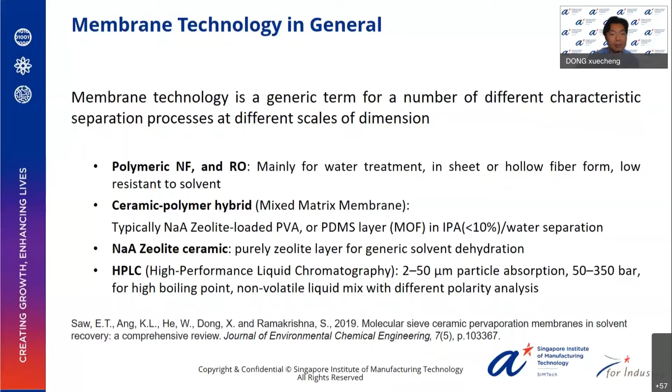So in SimTech, we developed a new series of ceramic membrane technologies, particularly for nano and sub-nano filtration. In this membrane, we incorporate crystal technology with angstrom-level filtration size. This is quite comparable to current reverse osmosis. And because it doesn't have any polymeric material, this pure ceramic membrane can be regenerated by thermal treatment. And this is considered a renewable membrane material.

And by nature it is also resistant to solvent media. So it has very strong stability in solvent filtration, and it can be applied to recover high-value solvents, let's say ethanol, IPA, and other organic material from water and solvent streams. So this would be a meaningful and very impactful technology for closed-loop sustainable manufacturing.

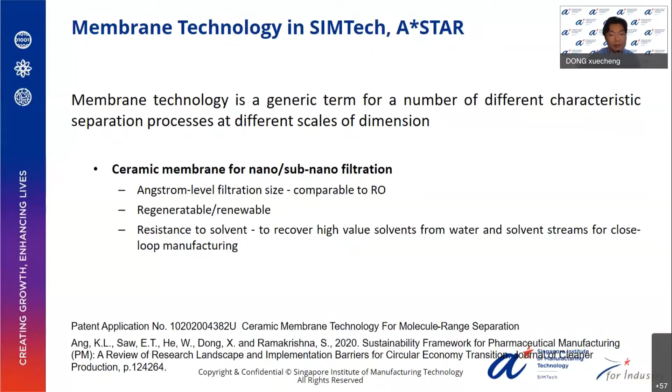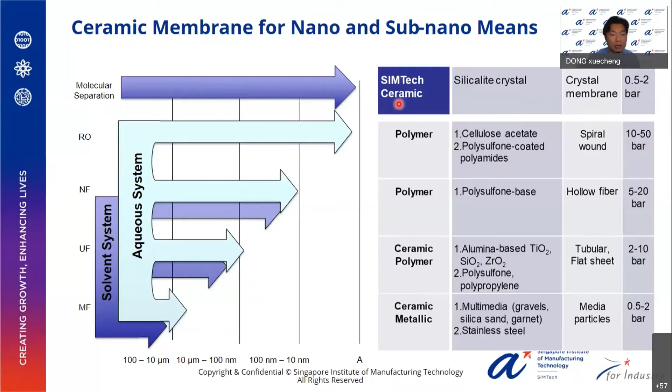The treatment is also a batch-by-batch process, and they are designed to be maintained as an offline kind of practice. Cost investment is also high, and the treatment involves temperature and other extreme conditions that may involve some chemical reactions if the waste stream contains sensitive ingredients and sensitive solutes that would cause health concerns and operation concerns.

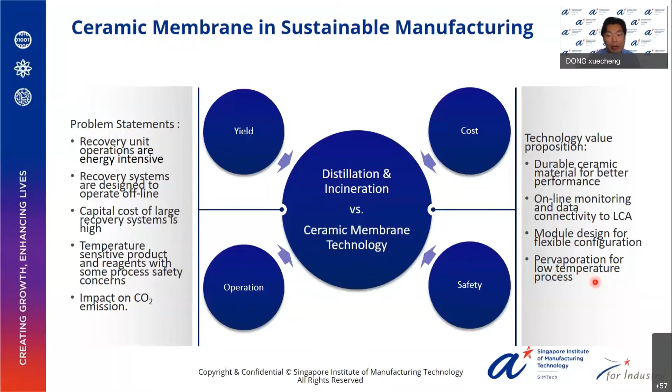And we also demonstrate our performance in a pervaporation setup. Pervaporation requires less temperature as compared to distillation. So later I will show some performance data using a pervaporation setup.

So let me go briefly through our membrane design. Our membrane is not a ceramic in a polymer matrix. It's a pure ceramic membrane. We use a commercial ceramic membrane support with or without surface modification. And we can also do our own surface modification to make sure our crystal material and the commercial ceramic are compatible. And eventually, we do a secondary growth to merge all the crystals together and form a continuous layer.

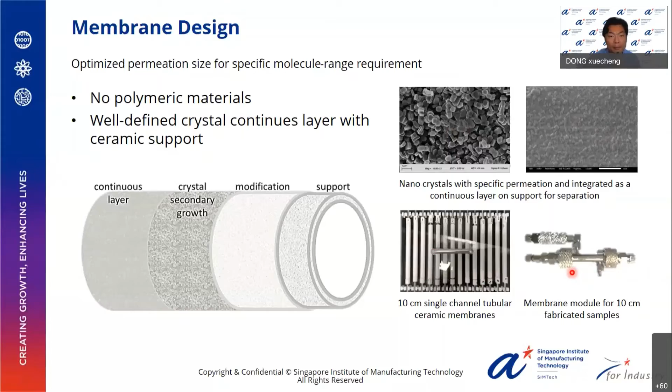And this is a picture of all the different variations of our ceramic membrane product. And eventually we designed this module to conduct a cross-flow filtration process. Let's talk about the performance. We have membranes for water. We have membranes for solvent. In general, we have two categories of our membrane technology. One is hydrophilic, one is hydrophobic.

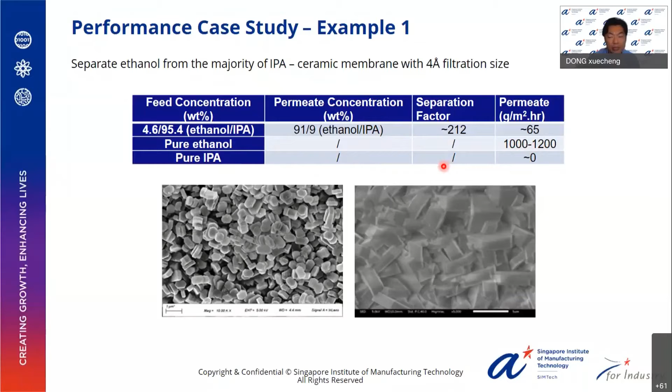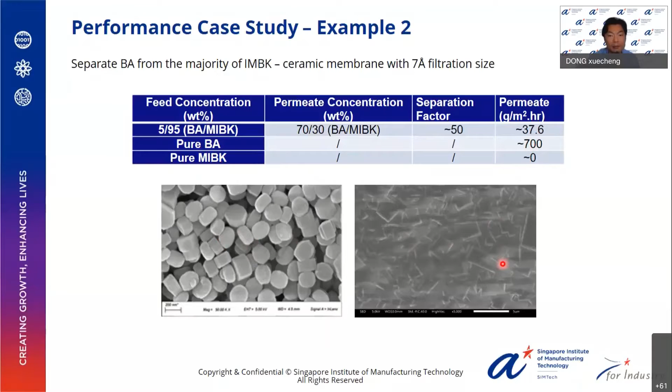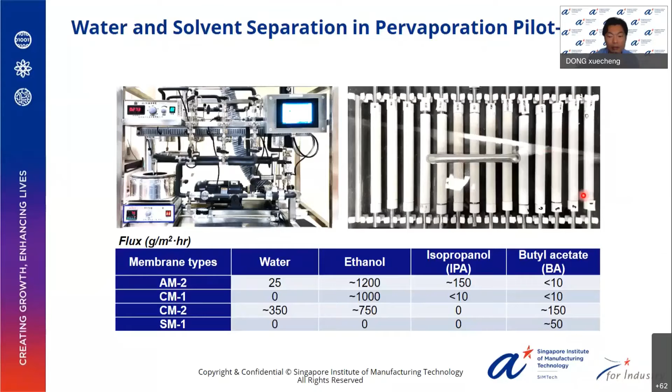And this is one of the summary slides of all the 4 typical membrane products we have. For water, these are the permeability, ethanol, IPA, butyl acetate. This is a class of hydrophobic membrane. So you can see all the water is almost rejected here. Although water has the smallest molecule, this membrane is still successful in terms of selecting or preferring the polymer or solvent media. And this is our pervaporation setup, and these are all the membrane products we have.

And the second portion, we calculate the energy comparison. Commercial distillation column absorption, we refer to the data from some available database. And we also tested and measured our energy consumption and converted them to the same unit. So in our process, our membrane separation has a significantly lower heat energy requirement and processing pressure.

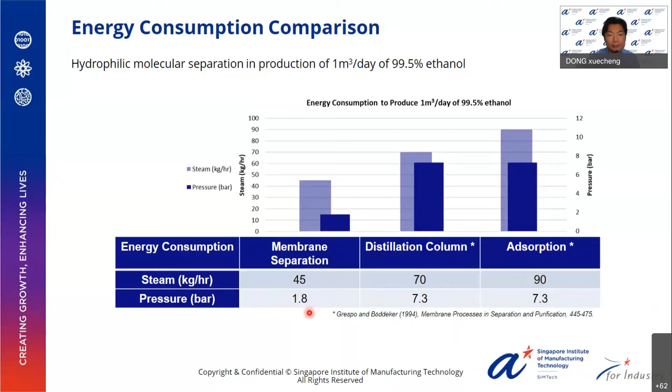Another example, we tested how to permeate or how to concentrate ethanol from a 50-50 ethanol water system. So this is the traditional distillation process, and this is the energy level of the distillation column. And this is our pervaporation setup. So the energy reduction is also very significant.

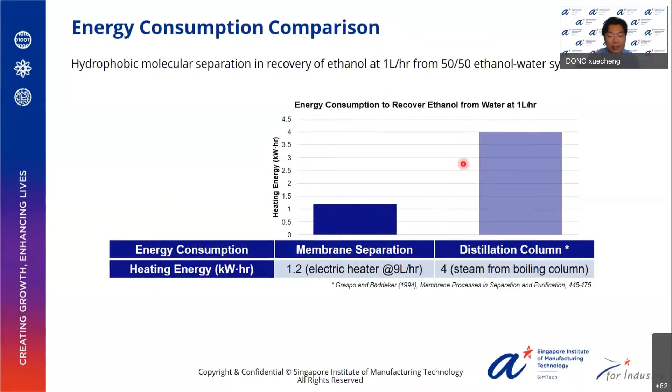So this would be a summary slide of our membrane technology. We consider all the commercial ceramic membranes, and we did further surface modification. And if we consider our unique crystal technology and we merge everything together, form a continuous layer, we can even provide a sub-nano, say, angstrom level ceramic membrane. These are a few pictures of the surface. And we further extend our technology to module design and preparation, system integration. And we can conduct a pilot test and pilot setup customization.

And these are the illustration of our approach. So we're talking about the size at nano and below nano. So this is the range. So this is the mechanism: smaller molecule or hydrophobic molecule. Let's say if the membrane is hydrophobic, it can permeate. If the membrane is hydrophilic, water can permeate. This is the product, this is the surface. So these are the modules we have, and this is the permeation setup.

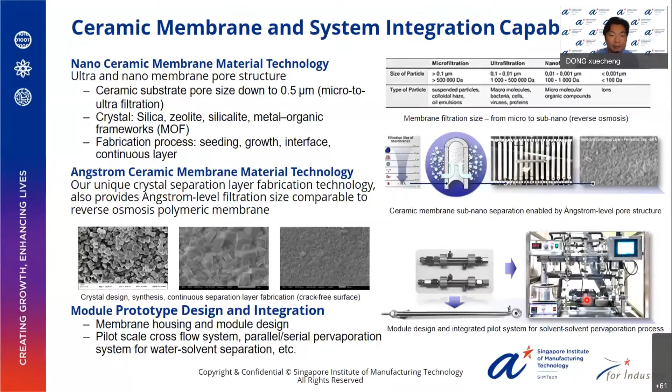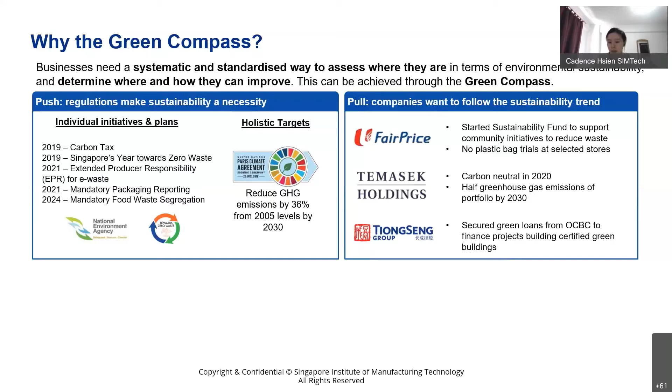Firstly, there are increasing regulations that make sustainability more necessary, whether on a government level or globally, with a goal to reduce carbon emissions. We also see that a lot of companies are going beyond what regulation requires and have the intention to follow a sustainability trend for their own companies as well as their own customers.

The Green Compass is a full framework that considers assessing the company at a basic level, how sustainable they are in different aspects. We recommend companies learn about sustainability so they can start their own sustainable journey. There could be some labeling and reporting useful along the way, and we are able to benchmark companies against some of the best in class to identify technologies they can adopt for improvement.

For the Green Compass, we take a value chain and life cycle perspective to look at sustainability. Through this perspective, companies can gradually transition towards becoming more environmentally friendly, more sustainable, and move in the direction of a circular economy.

We look at operations within the company, a product life cycle, and a supply network perspective, and the key areas we are interested in are carbon, energy, water, material, and waste.

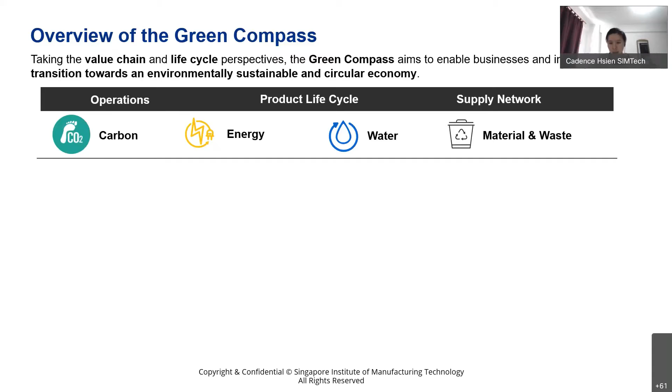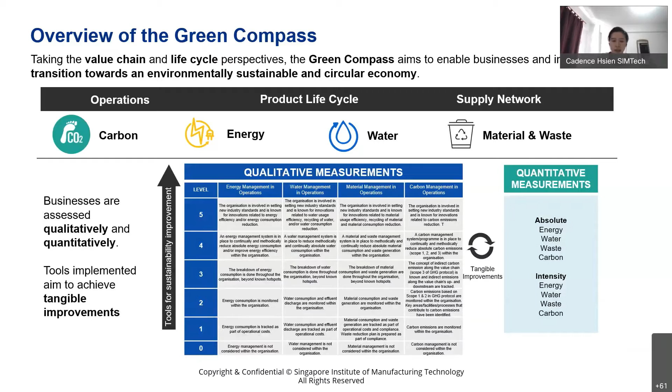The overview is to use qualitative means to assess companies so they can see qualitatively how they are performing, but also link this to quantitative measures so they can implement technologies, have tangible improvements, and come back to see how certain improvement activities have helped them.

The areas we look at within operations are energy, water, material, and carbon. But we also want to encourage companies to look along their whole supply chain and product life cycle to identify aspects of environmental impact that are crucial to their operations, as well as impacting

the country which is providing the raw material or even where the customers are using their product.

Today I will go more specifically into water management and operation. In this area, we consider all the water-related processes within a facility, as well as encouraging companies to look at improvements in water consumption efficiency that they can work on.

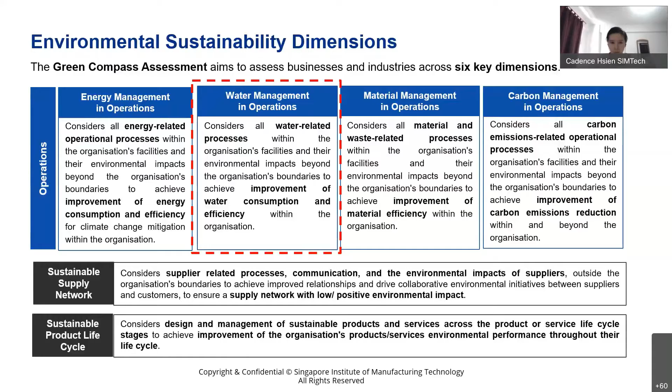Within water management and operations, we focus on areas key to driving water management improvement in the organization. This can be from a policy perspective — what policies around water management has the company adopted, what is the level of knowledge for water management within the organization, and what are some of the targets for improvement in terms of water efficiency.

We also encourage companies to look at the information system to know what type of water data is currently collected, to what level of detail or how frequently the water data is collected. This helps the company understand the water flow and water balance, and potentially identify some of the hotspots for improvement.

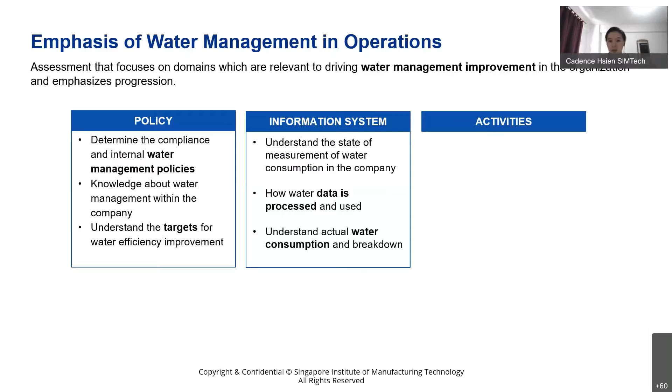We are concerned about how the collected water data is processed and what it is used for, and also understand the actual quantitative consumption and break down the different areas in the company.

Lastly, for activities, it's important that after the company identifies the total water consumption or hotspots in the area, we look at what technology or projects have been implemented before so we can improve water management and reduce water consumption.

In the self-assessment we have developed under the Green Compass, we look at these several aspects to determine the base state of water management in a company, and also try to collect some data about water consumption.

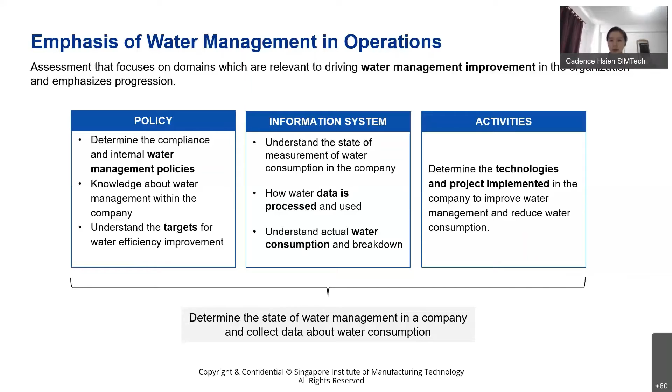This data would be useful in the future when technology has been implemented for improvement. We can come back to the past data to see what are the impacts due to the implemented technology, what are the improvements due to the technologies that have been implemented.

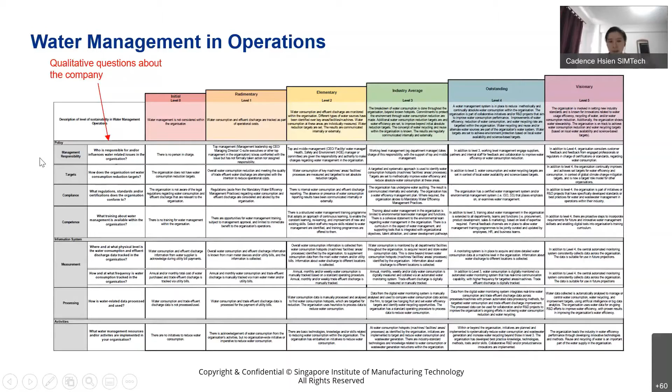So this is what the assessment looks like. It's in a maturity model form. Firstly, we have some basic qualitative questions about the company. The first row is about management responsibility: who is managing the water requirements for the company? The person answering this question can read across the different levels and identify what level of description is most suitable.

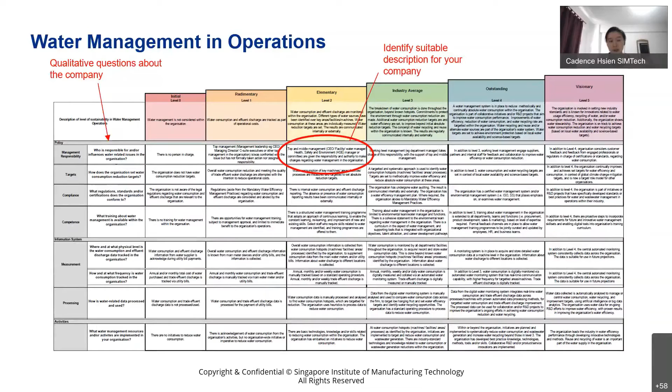This helps us have a basic understanding of what the company's level of maturity is in terms of water management. We have graded this in a maturity progression, so going up towards the right, you move from initial, which is level 0, towards visionary. The description for companies becomes more stringent the higher you go.

The benefit of this is that if a company sees they are at level 2 right now and want to achieve better water management, there's some idea on what some of the improvement steps could be as they gradually progress towards becoming more outstanding or visionary.

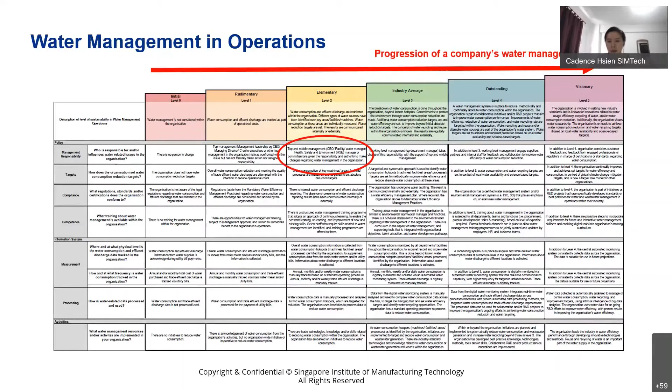The Green Compass is actually a full journey for companies, and what I've shared with you is the first step, which is to assess, having a basic understanding and assessment for the company. Within here, we recommend that companies learn about sustainability as well as water management practices, collect relevant data, and compute some key KPIs.

After learning and assessing, they can choose to verify with a third party to see whether some of the data that they have collected is valid and stands up to scrutiny.

After that, they can identify key areas and hotspots to prioritize for improvement, as well as plan their roadmap, whether it's a short-term, medium-term, or long-term sustainability plan for water management. This can be planned through our Green Compass journey.

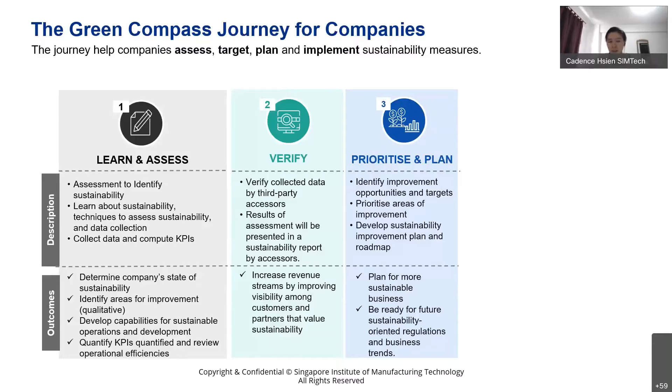Right after the whole plan has been developed, there can be a process to identify suitable technologies. For example, what Dr. Dong shared just now, potentially some specific technology that can provide tangible improvements should be implemented to improve the overall water management across the facility or even in terms of product management.

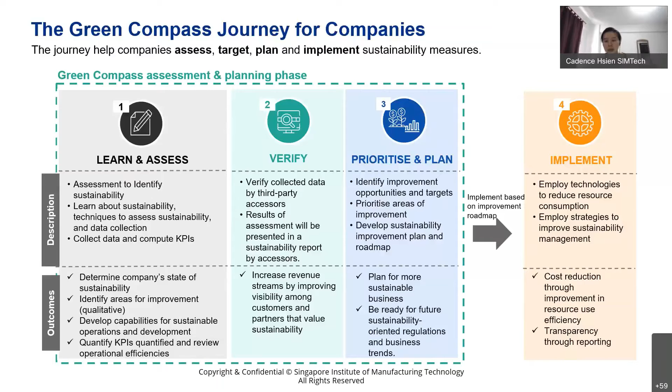So the Green Compass emphasizes the first three phases, and we can link companies towards potential technologies for implementation as well. Within the first step, where we learn and assess, we are in the midst of developing an online version of a self-assessment where companies can quite easily and for free assess their state of sustainability.

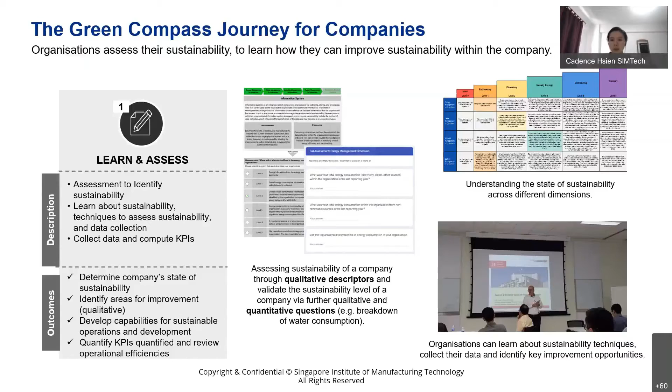We will also provide some basic results similar to the top right-hand corner, where you can briefly see a summarized version of the results of the assessment. We do recommend that you couple this with some learnings about sustainability or water management so that you can identify the most suitable area for improvement.

Next, there can be a step for verification if it's necessary for third-party assessors to verify the data that has been collected. Then the third step would be to prioritize based on whether it's the policy, information system, or activities that are not doing so well. Perhaps you want to prioritize that for improvement and plan for a longer-term sustainability journey for the company.

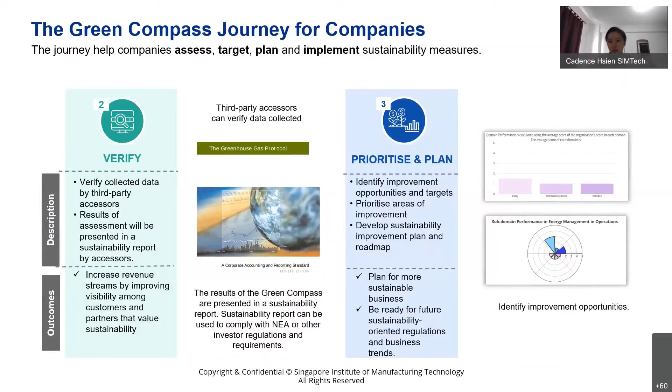So this is the end of my presentation. I'm very happy to have shared about the Green Compass in the area of water management.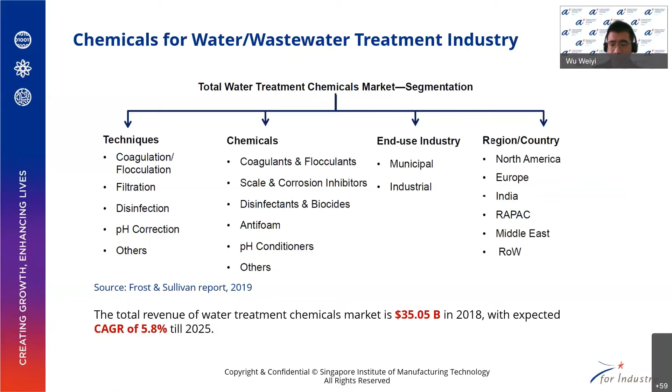As we are pursuing a circular economy and sustainability, there's a demand to reduce the chemical consumption associated with the wastewater treatment industry.

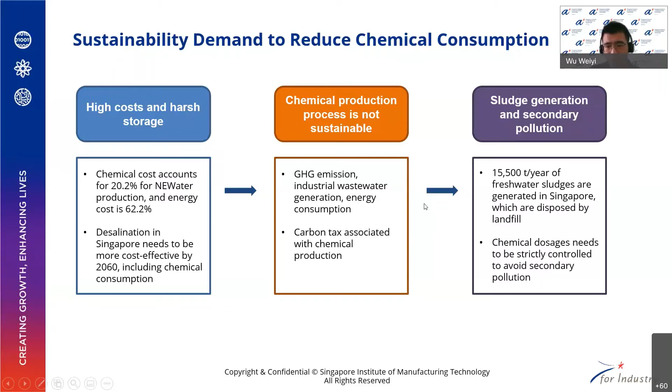At SimTech, we focus on several technologies. One is the electrochemical advanced oxidation process, or in short, EAOP.

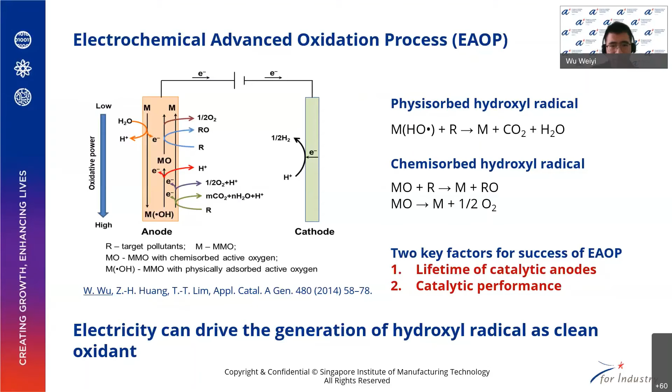After anode materials, let's look at the hydroxyl radicals. As we know, hydroxyl radicals have many desirable properties compared with other oxidants. However, the main bottleneck for hydroxyl radicals is their short lifetime in water.

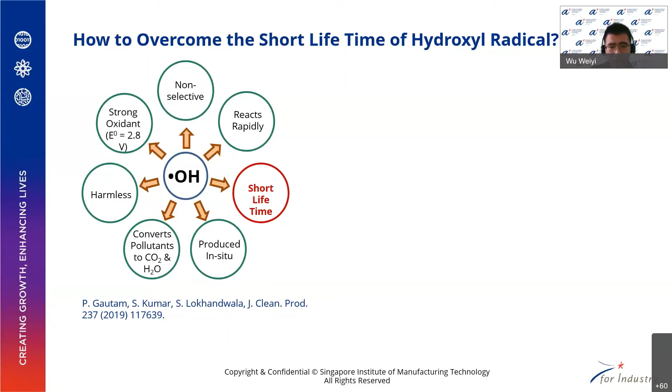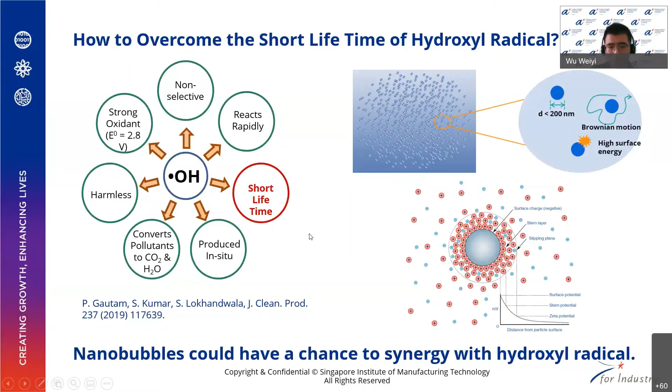There's a report that nanobubbles could even facilitate the generation of hydroxyl radicals. Because of this, there's great potential to hybridize EAOP and nanobubbles for a long lifetime of hydroxyl radicals.

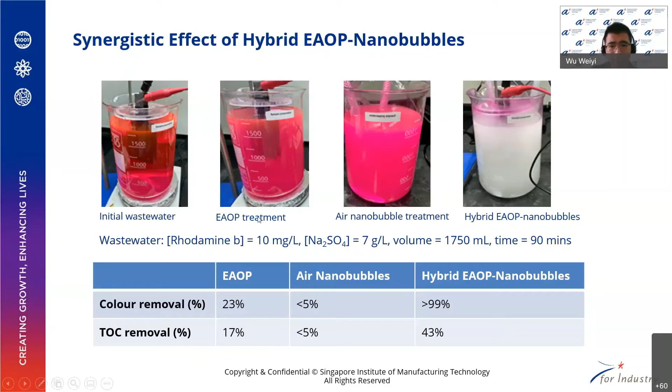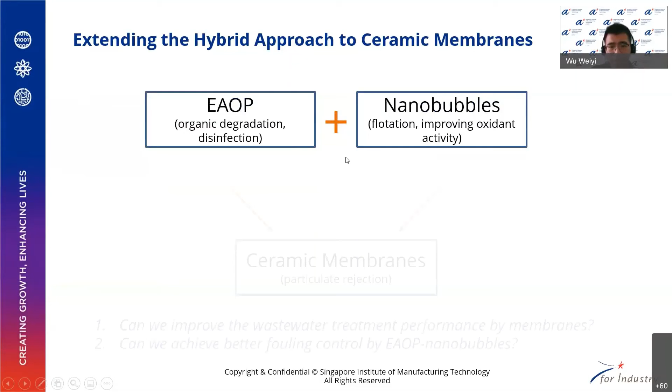Therefore, our approach is extending the hybrid approach to ceramic membrane for particulate rejection. The ceramic membrane could improve performance by particulate rejection, and on the other hand, can EAOP and nanobubbles, this hybrid method, further improve the fouling control of ceramic membranes?

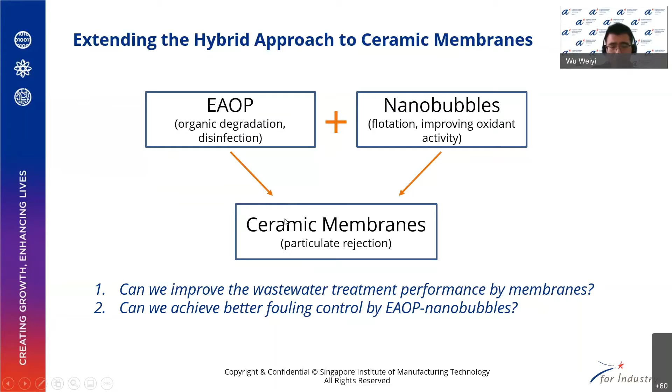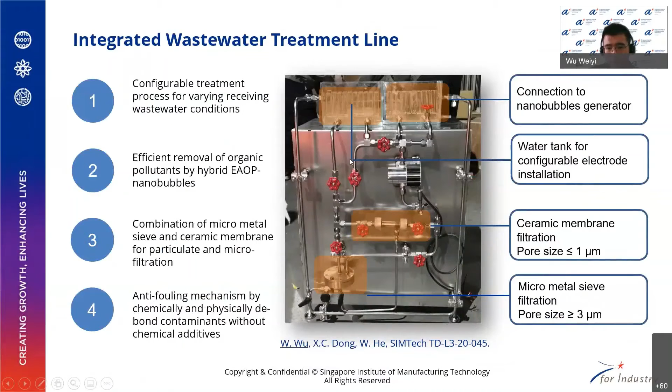With this, we built an integrated wastewater treatment setup, which consists of 4 parts. The first part is the electrochemical cell, which could customize the electrode installation, and there's a nanobubble generator connected to the water tank.

For this setup, we have ceramic membrane cross-flow to provide cross-flow filtration with a pore size less than 1 micron. The other filtration unit is the micro metal sieve filtration, which has a bigger pore size, more than 3 micrometers.

By this design, this setup has 4 features. Firstly, it is configurable - we can customize the treatment process for varying receiving wastewater. Secondly, it can provide good removal for organic pollutants by hybrid EAOP and nanobubbles. Thirdly, because we have 2 filtration units, it can provide both particulate and micro filtration. Finally, we hope to achieve anti-fouling by nanobubble and EAOP without further chemical additives.

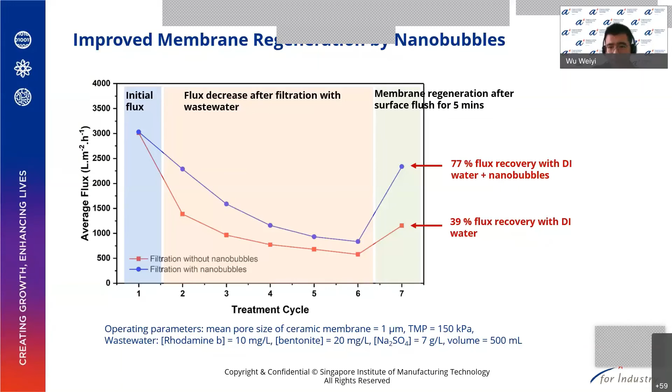Secondly, simply by a surface flush for 5 minutes with water and nanobubbles, we can see that the flux can be recovered to 77% of the initial flux, which is much better than surface flush with DI water only. So the experimental observation clearly indicates the advantage of this multi-physics approach.

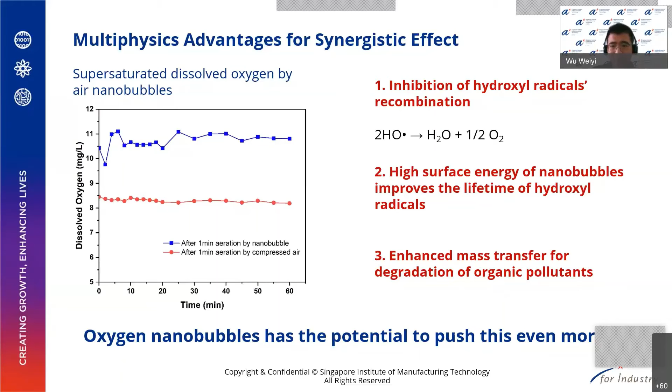So for the future research plans, there are two ongoing or being planned. The first one is about the EAOP, the electrode material development. We are looking to minimize one of the bottlenecks of EAOP, which is the halogenated byproduct generation when the water has substantial halogenated elements such as chloride. And currently, this topic is supported by A*STAR grant. So we want to achieve this by both anode design and engineering the electrochemical cell.

Then the second research plan is to scale up the current integrated wastewater treatment setup and make it digital ready in the future. So this includes the development of scalable and configurable modules, and also data analytics and predictive control by incorporating with sensors and IoT. So this is the last slide of my presentation today.

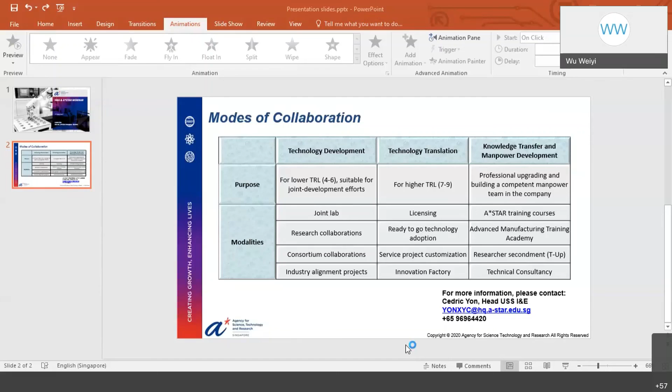Maybe I can ask Derek's question verbally. During the control experiment, do you precondition the wastewater sample to what pH? Yeah, actually, the wastewater for the setup we are using is all simulating wastewater. So we do not specifically precondition the pH. However, their starting pH should be the same. And in a future study, we can investigate this particular parameter to see what is the influence for membrane regeneration. Thank you.

Thanks. As well as for Cadence, are there any fees applicable for the Green Compass Plan, and how do we engage for this initiative? Right now we are in the validation phase, so we are inviting companies to help us in our validation journey. Subsequently, we are hoping to run this together as a course, so that companies, in addition to doing the basic assessment, they can also develop sustainability improvement competency that can bring them beyond just doing the basic assessment.